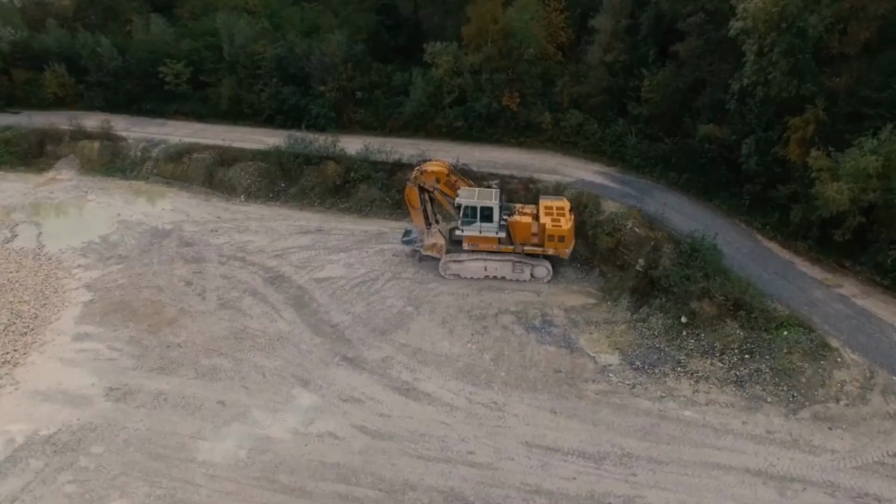Since 2018, ENCI closed down, and the city is looking at how to repurpose the factory grounds. We face the challenge of how we can preserve its heritage and deal with the landscape ENCI left behind. The potential of the ENCI area is huge.

The area lies within cycling distance from the center of Maastricht and close to the Belgian and German border. It is surrounded by beautiful nature, and the quarry is a unique type of landscape. But mostly, the caves are a valuable heritage that is worth preserving.

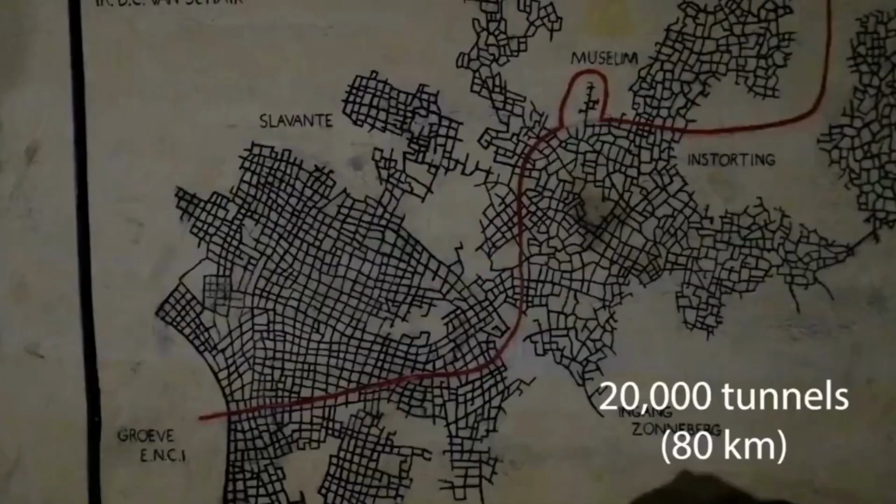Heritage organizations are investing in the site and are looking to preserve its cultural value through development. But what that development should be remains a question.

The scar in Sint-Pietersberg shows very clearly how the industrial era has left its traces. The enormous impact of heavy industry is very clear at Sint-Pietersberg because of the contrast with the hilly landscape around it and the city center of Maastricht.

This alarming situation calls for a dialogue between the residents of Maastricht and active professionals in the spatial domain, such as architects, urban planners, project developers, government, entrepreneurs, and maybe educational institutions who want to help the city move forward and not backward.

Currently, there are no solid plans for reusing the site, and the unique factory ensemble is at risk of being partly demolished. In 2009, ENCI was ordered to establish a study on the possibility of transformation. In this study, it was decided that the quarry should be turned into a nature area within Nature Monuments.

This situation changed unexpectedly with the announcement of the total production closure in 2020. The former plans for the site's transformation were no longer relevant. At the end of 2020, during the development process of a new zoning plan, ENCI submitted demolition proposals within the plan area.

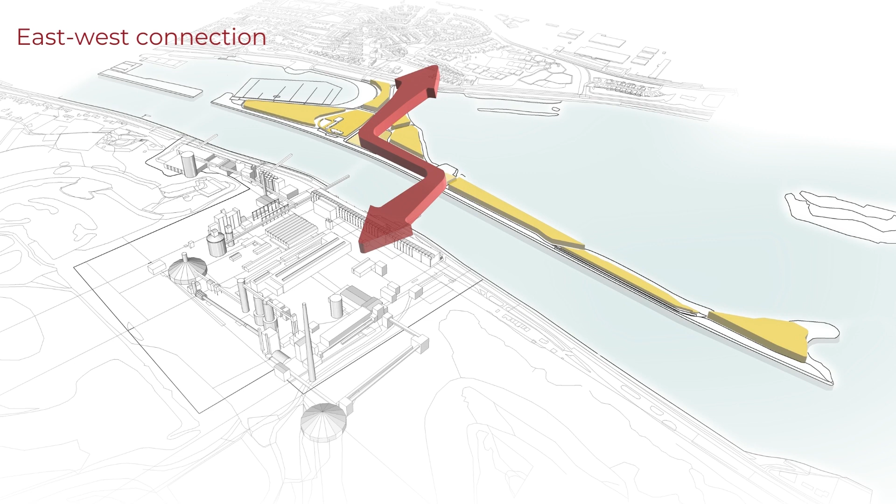This site location is working as an enabler for urban development. This means it's going to develop a new connection from the east to the west and create a new horizon and access to ENCI. As a power tool, it informs the locals, stakeholders, and investors to bring attention and money to the area for the future plans of ENCI, and also for rehealing the nature.

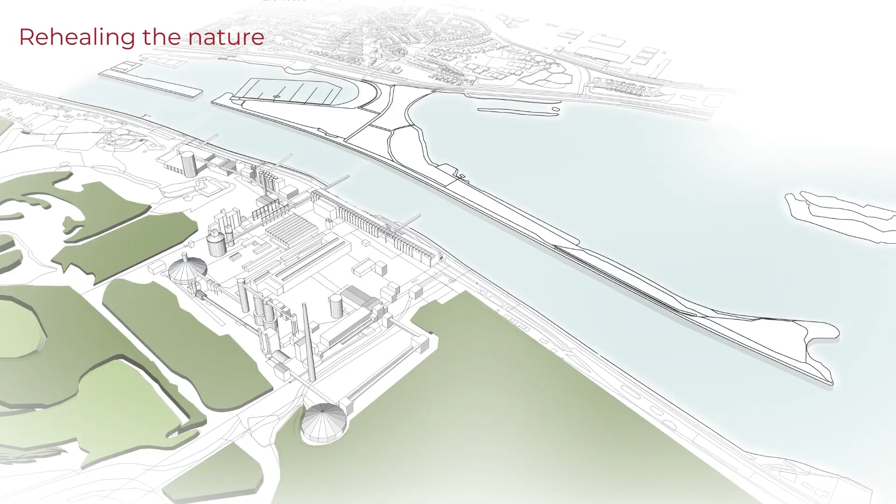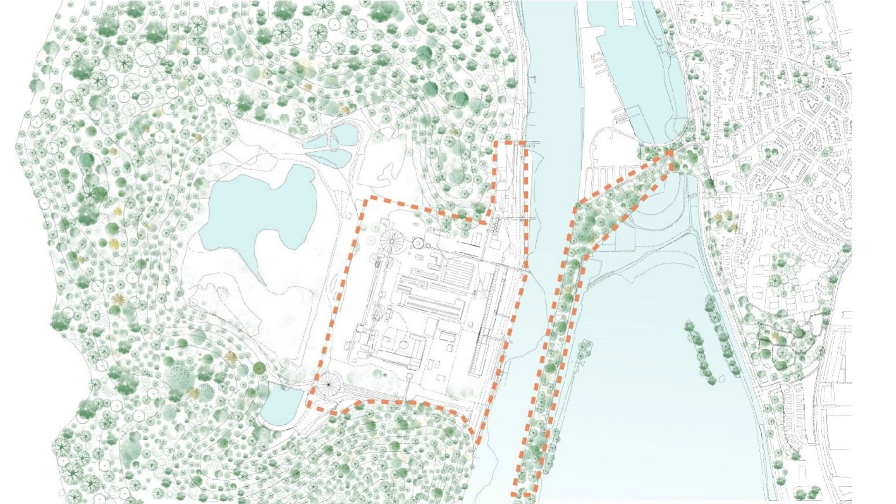From a building historical point of view, the ENCI site is important as a sample of 20th century concrete construction. The diversity of materials used makes the buildings on the ENCI site of high building historical value. The enormous scale of many buildings means that all kinds of different supporting structures have been used, both in concrete and steel. These buildings were impressive feats of engineering at the time.

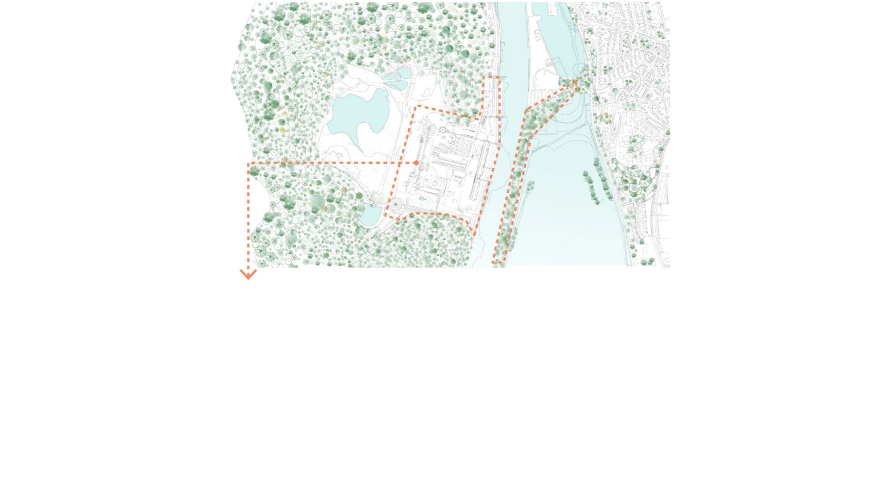The scale of the buildings meant that conventional construction methods could rarely be chosen. Many of the buildings, therefore, have a construction technique and appearance that is unique to the Netherlands. Because of the factory function, buildings were designed on a machine scale and not a human one. And that's how the grids translate on the site location, scaling down from machine to human horizon.

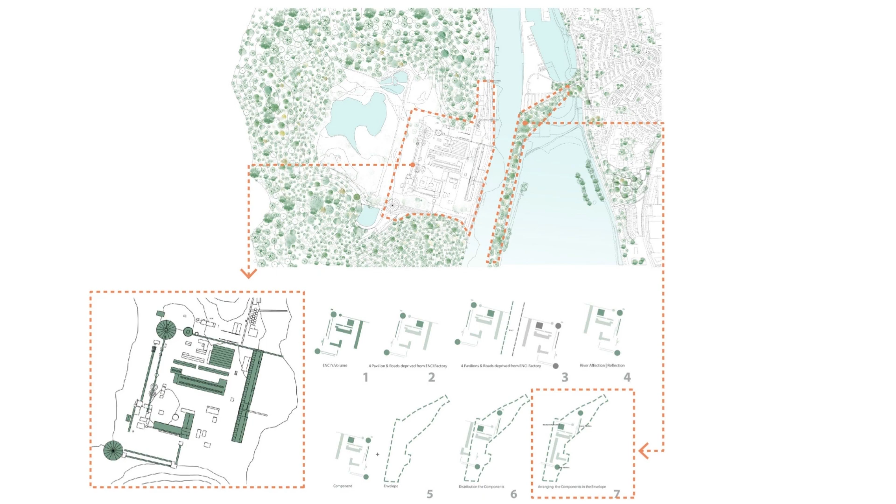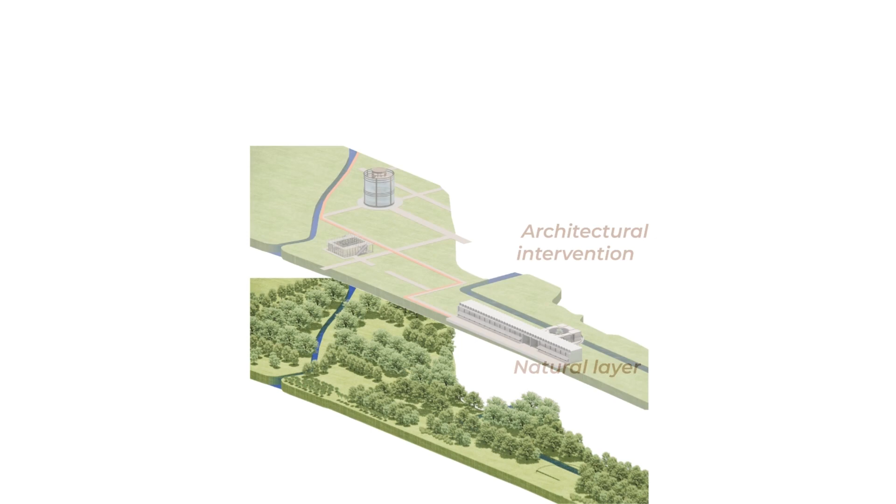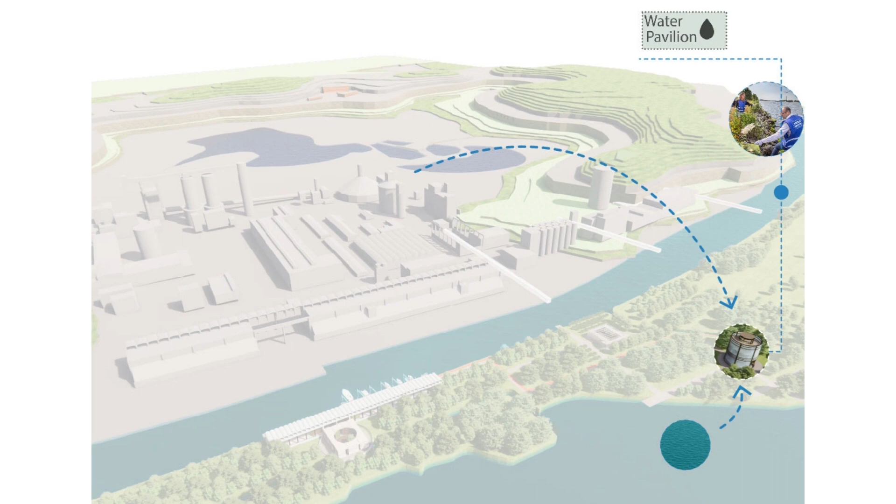The new routes follow the scale of water and exist in nature, which determine the atmosphere of the shore combined with the industrial structure. The edges are designed as living spaces along the water, and routes have been laid out for bicycles and walkers.

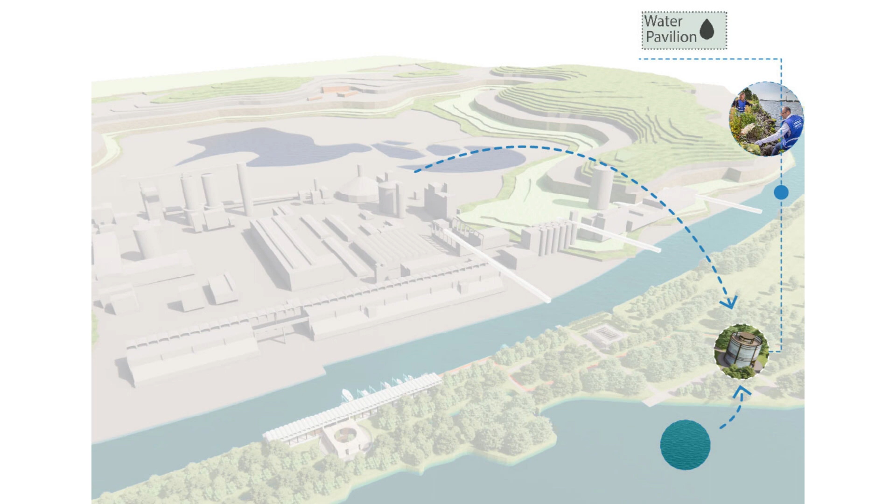The route starts with the water pavilion, which informs the user about the important role of the Maas River and the water cleanup project, and reusing the collected wastes for new recycled material.

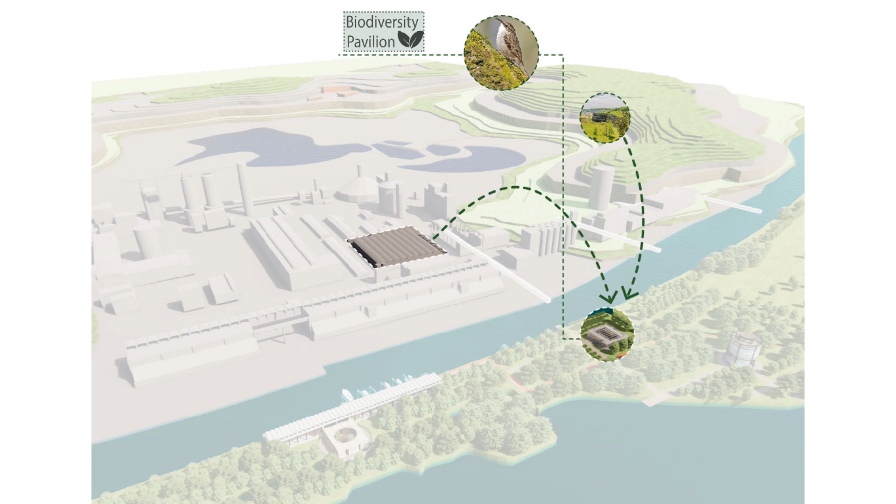The next discovery spot is the Biodiversity Pavilion, which educates visitors about, first, the interruptions that ENCI has caused to the biodiversity cycle; second, the diversity of bird types in the area; and third, how we can help the biodiversity re-heal by protecting the birds.

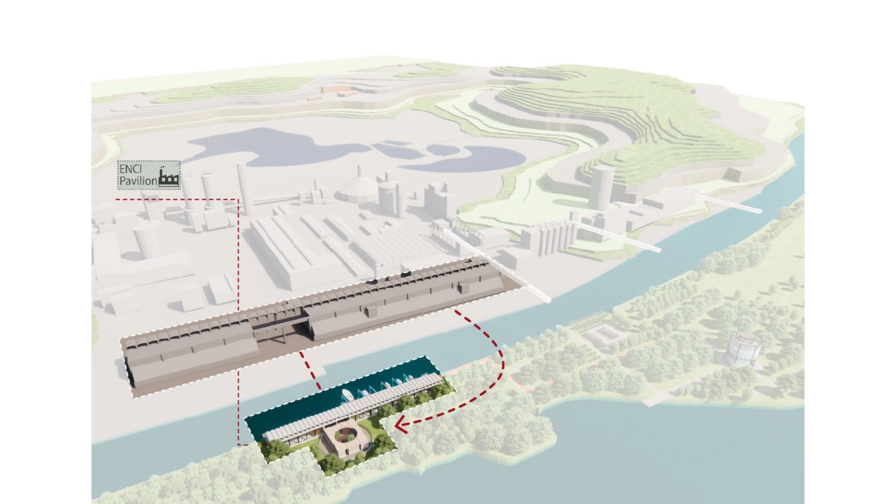The last destination is the ENCI Pavilion, which is a scaled mirror of the iconic ENCI entrance building. It has three different parts: a working cafe for workshops and lectures, a water transportation hub, and an ENCI maze that represents the ENCI products and future plans for the ENCI cement factory.

The park materials, architectural pavilions, and the discovery route to the ENCI area offer a hold on the identity of the genius loci.

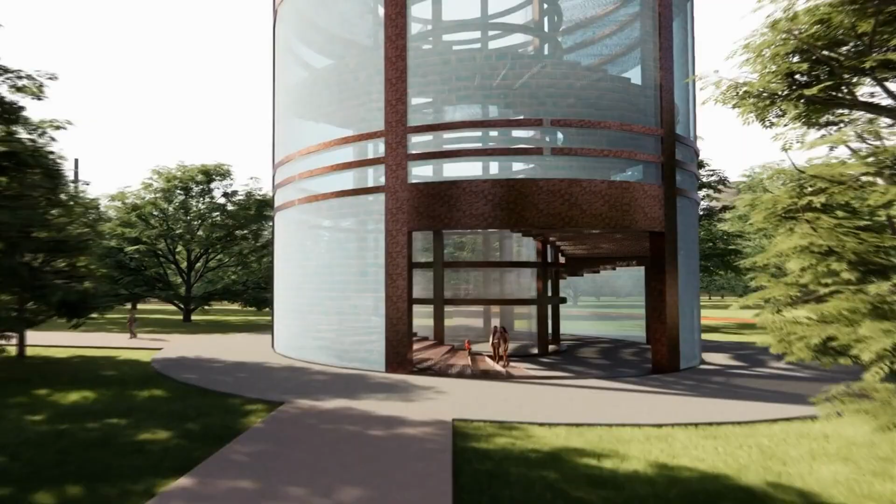The water pavilion, as the starting point of the discovery route, attracts visitors to climb up and experience the feeling of being in the middle of water without getting wet.

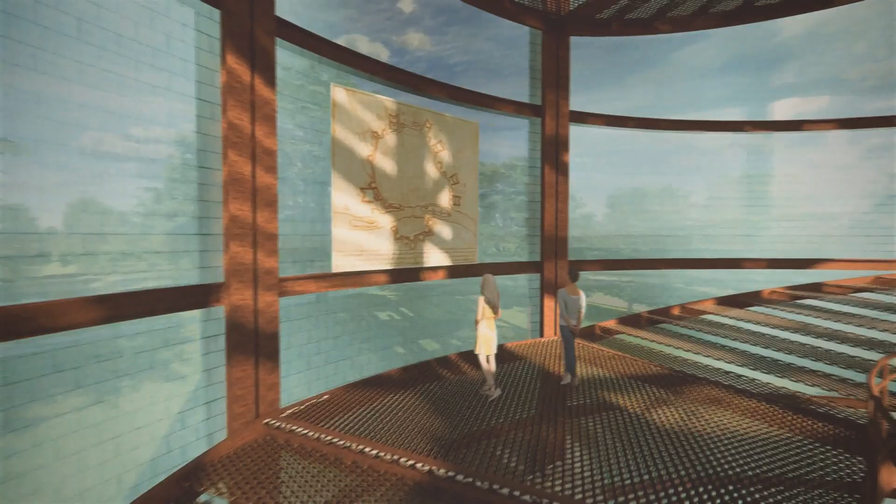In the spiral route to the top, the visitor gets information about the active and essential role of the water, especially the Maas River - from its history, how it has been changed over the years, and how polluted it is at the moment.

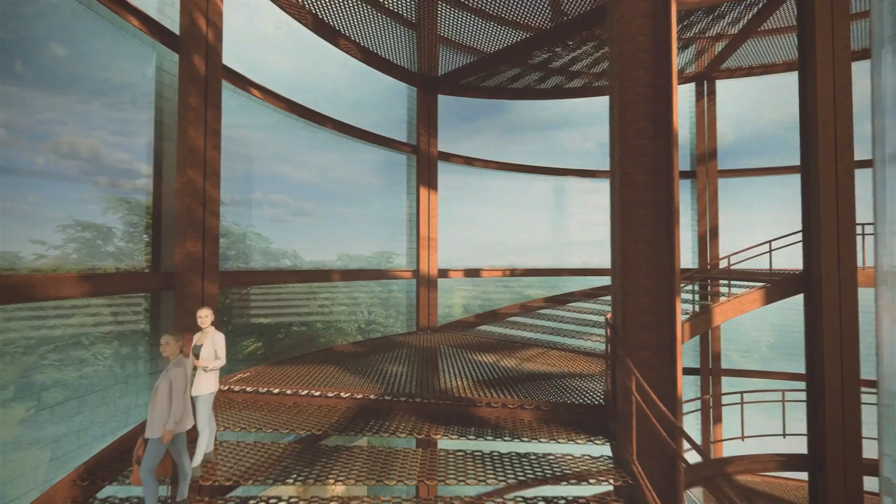Via the help of the Lives project from the Euregio, and the panels designed along the route to the top, the visitor gets information about how they can help with cleaning up the Maas River from plastic waste. Later, when they arrive at the top of the floor, they see how ENCI looks beside the Maas River.

When they come down, they have the chance to buy plastic bricks made out of the plastic waste from the Maas River. Via this experience, they get a small sense of ownership over the cleanup project of the Maas River.

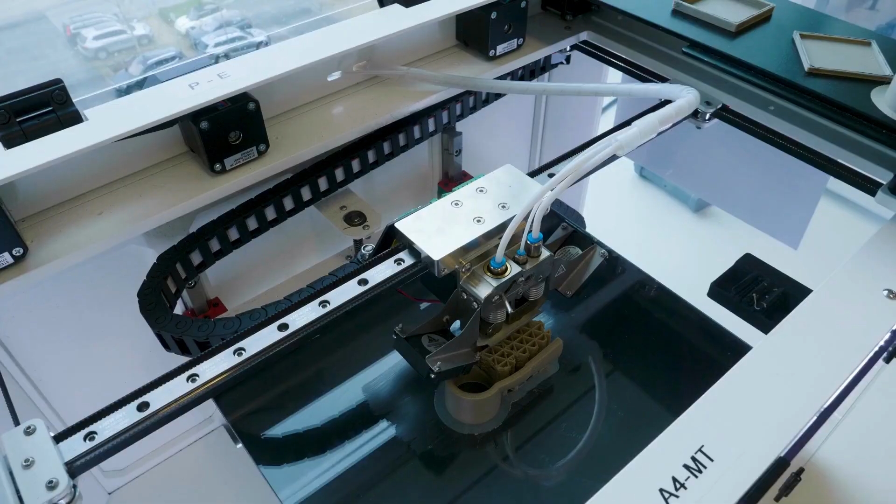The recycled plastic bricks are filled with filtered river water through a pumping system supported by solar panels. This means the cladding transparency height relies on the water level, giving a better impression to the visitor. The concept is to recycle plastic waste and make plastic bricks out of them.

The brick layer of the pavilion works as a cladding layer and does not have a construction function. Therefore, it can be filled with water coming from the Maas River.

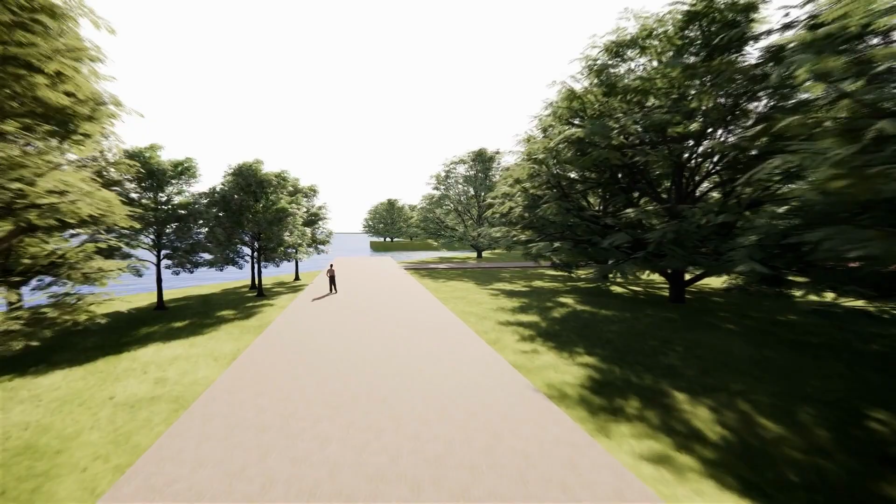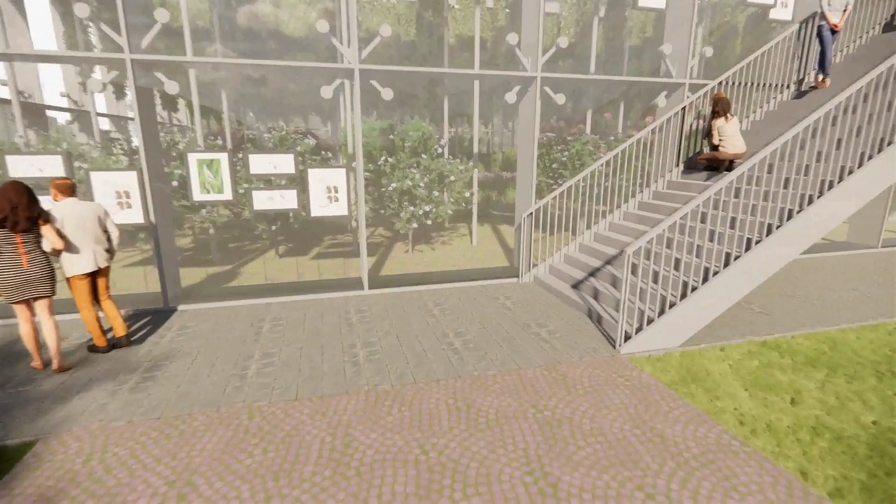During the years that ENCI has been active at the Sint-Pietersberg site, gas and water pollution have affected the biodiversity cycle. Birds and plants, as a big part of this cycle, are the focus of this concept.

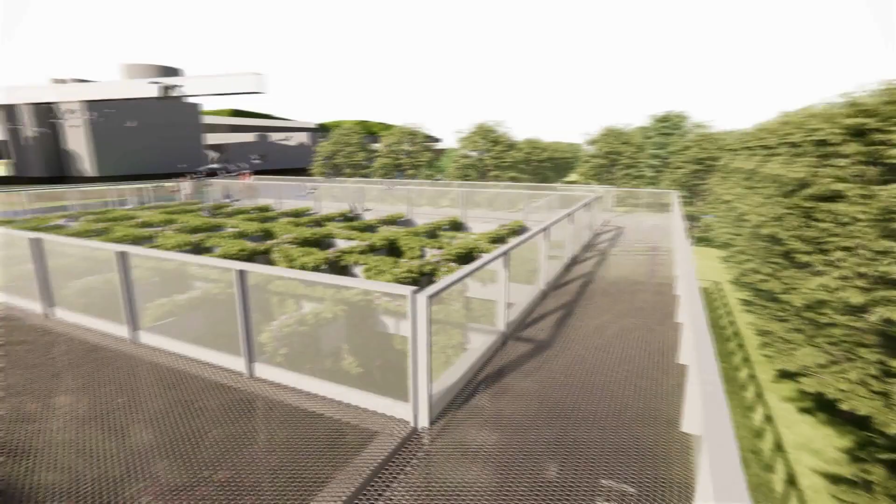On the other hand, the eagle owl is one of the most important heritage species of Sint-Pietersberg. Their courtship is in winter, with a highlight in January, when other types of birds leave because of the cold weather, but the ones that stay must take care of their food so they can survive.

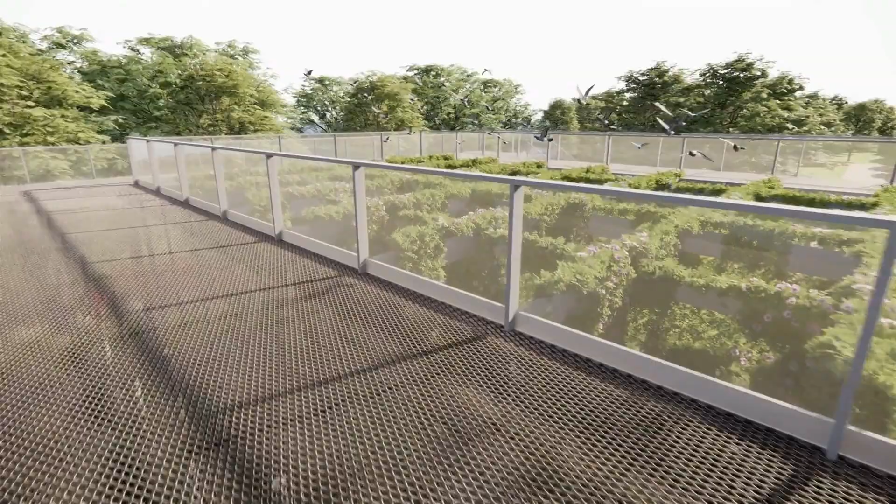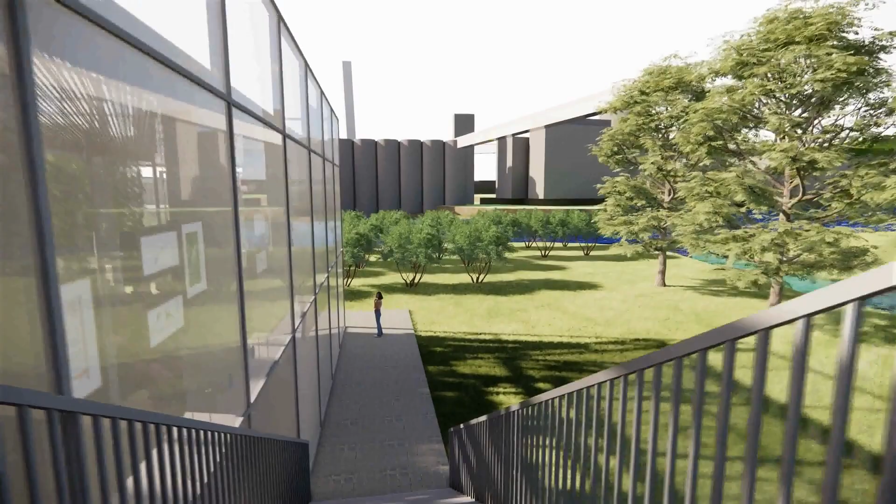The Natuurmonumenten hold workshops during winter to show people how important it is to provide birds food during the cold weather. But this pavilion goes a step further by combining these two facts, planting species that are missing in the cycle of biodiversity to attract the birds who left the area because of ENCI pollution.

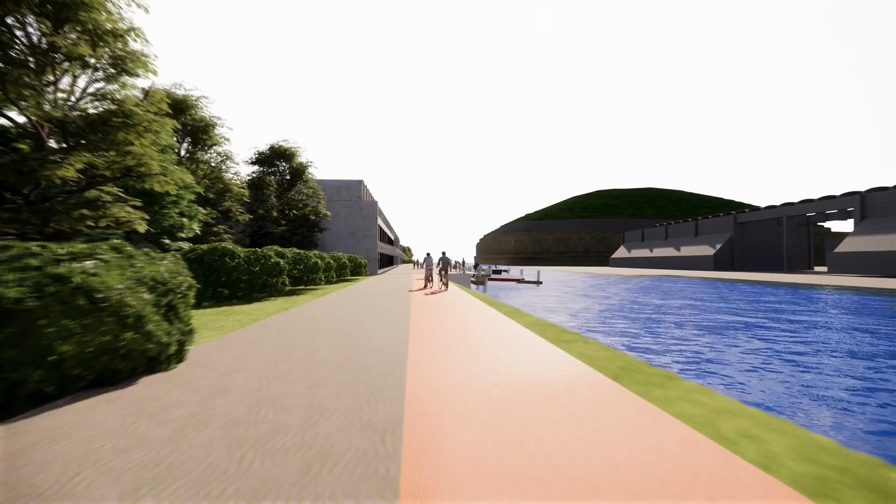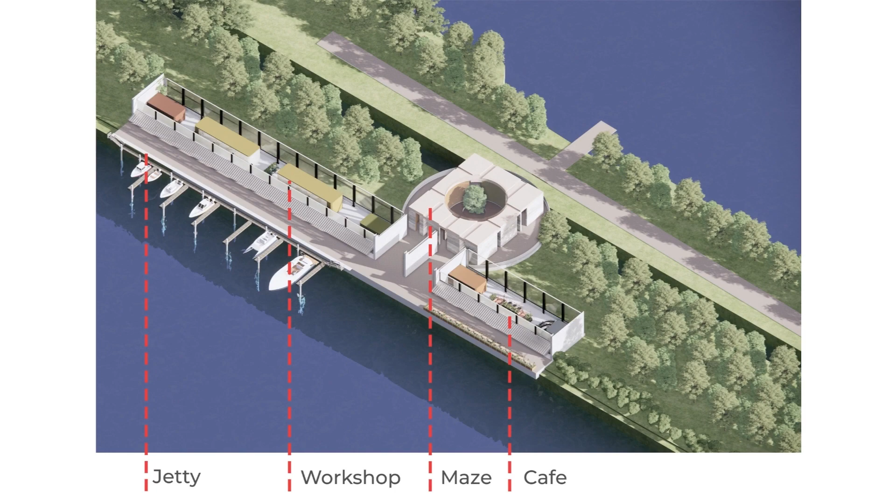The ENCI Pavilion, as the last destination, represents the iconic monumental entrance of the old factory by mirroring, scaling, and standing in front of the original one.

The building invites visitors to a work cafe where they can eat, drink, and discuss what they have experienced through this discovery route.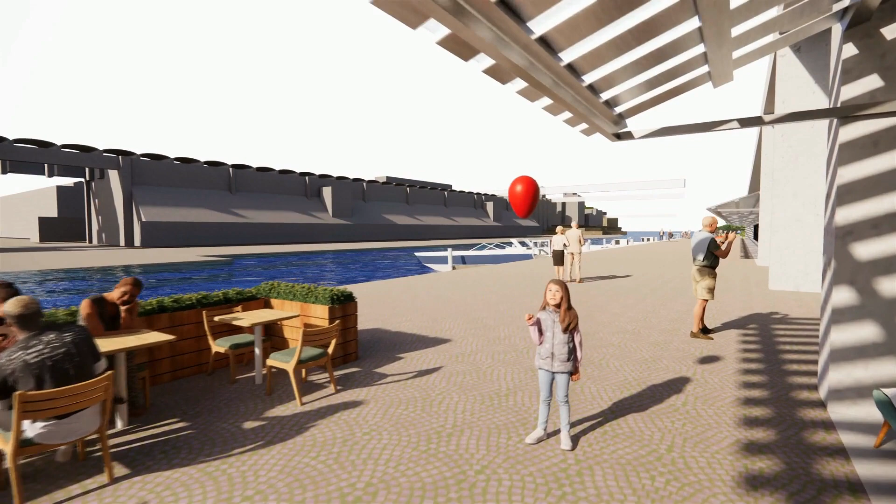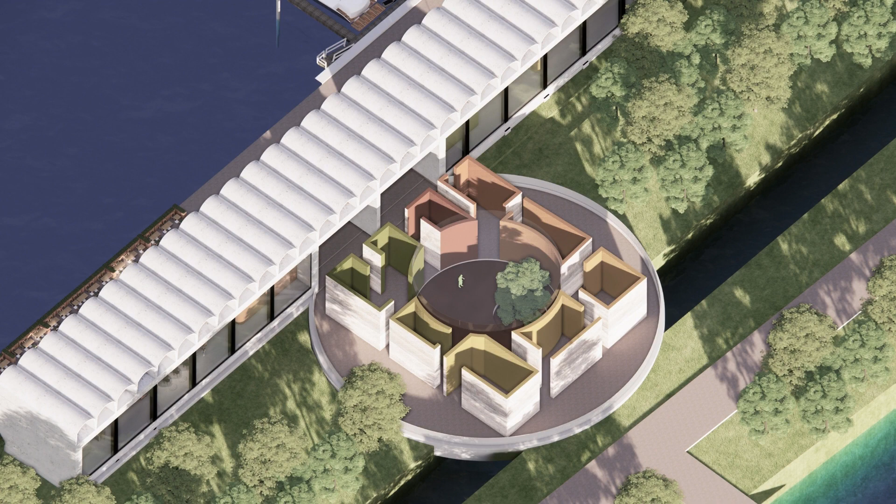Then it leads them to a maze where visitors go through a circular route. Rooms educate visitors in an order that starts from the past and goes to the plans of the future ENCI has for the area. They inform how ENCI has used the mergel as a raw material for making cement.

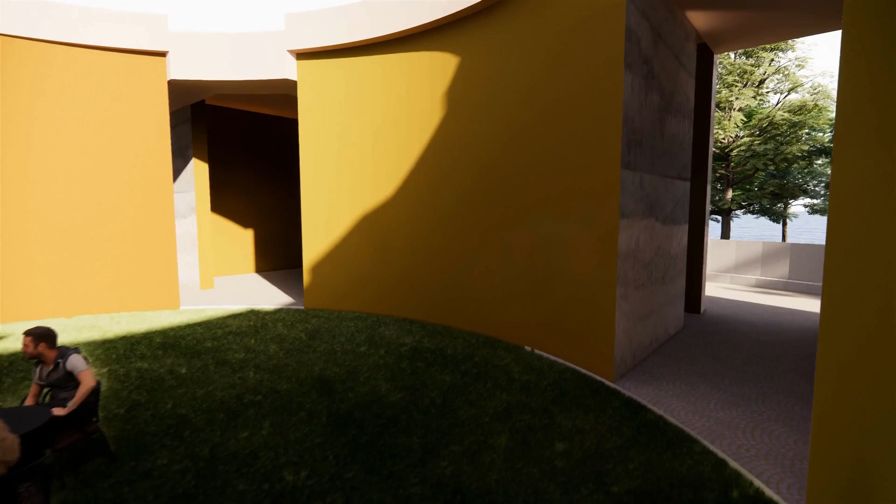ENCI cement factory wishes to reheal the demolition it caused. The use of cutting-edge technology like virtual reality helps visitors see what the future of the area will be.

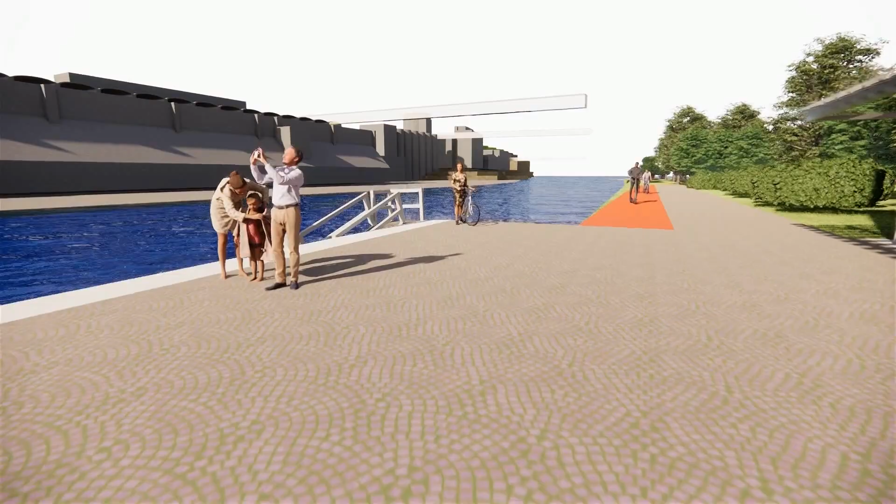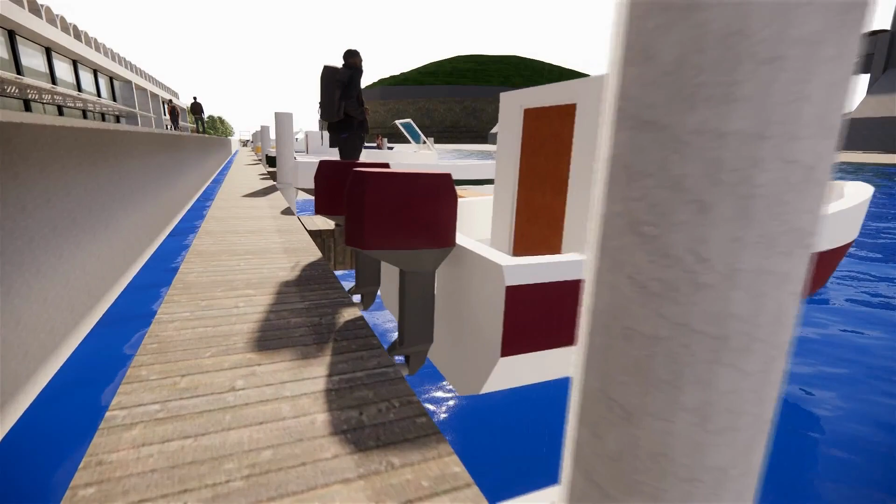And the last part is the best part. Here, people get the opportunity to take a water taxi, cross the river, and go to ENCI to experience everything at real scale.